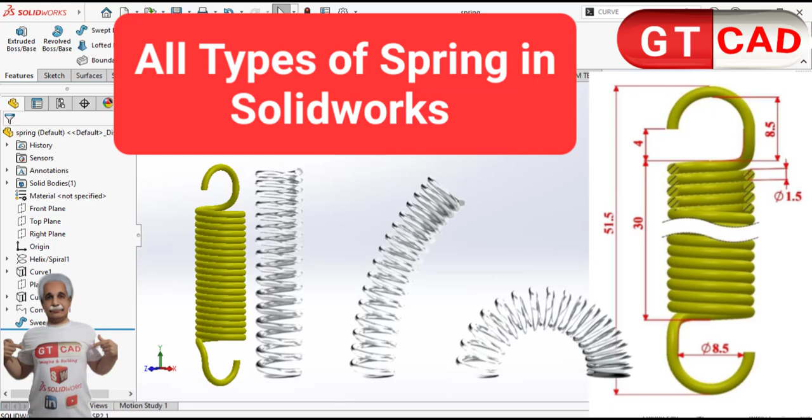Today we have the spring project in SolidWorks. As you see here, we have the tension spring. Let's go describe some types of spring. Here we have the tension spring, compression, spiral, and torsion spring.

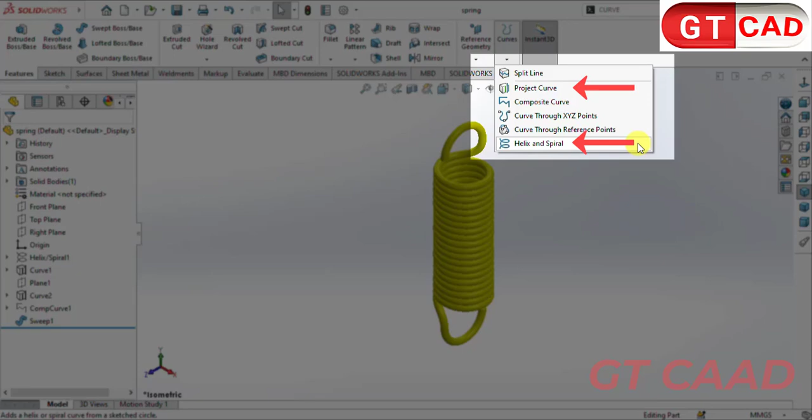In this project, I want to support two types of spring, tension and compression. Compression is so easy, but for the tension, we have some advanced features in curves in SolidWorks. In the Features tab, we have Curves, and Curves has some features like Helix and Spiral. Also, I want to use Project Curve, to combine some sketch curves into one sketch, and after that, Composite Curve.

Okay, let's look at the drawing. Here we have some dimensions of this spring. As I said, this spring is the tension spring. It's the standard dimension. Here we have 1.5 millimeters as each coil diameter. It means I used a wire to produce this spring where the diameter of the coil is 1.5.

The main body is 30, and the total or free length is 51.5. Here the gap of the hook between the main body and the hook is 4 millimeters, and the total length of the hook from the main body is 8.5, and the final dimension is here: the diameter of the hook is 8.5. Okay, let's go model this spring.

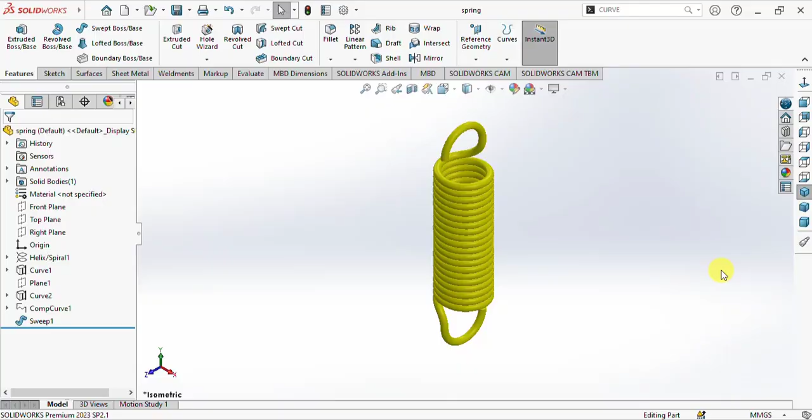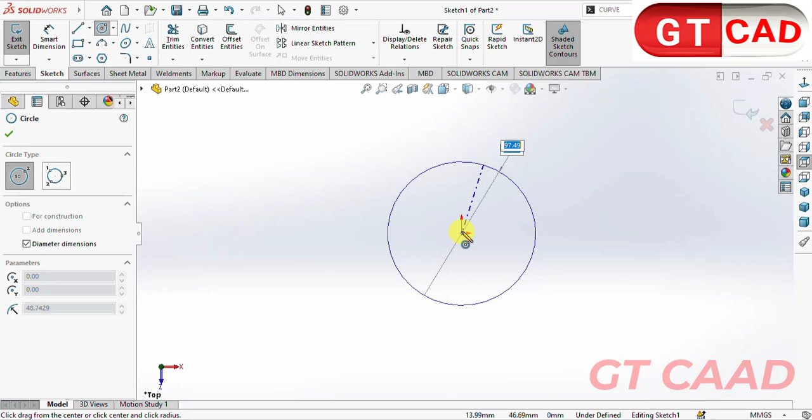The first step, press Ctrl N, create a new part. Create a 2D sketch on the top plane. So we have 30 millimeters for the main body and 1.5 for each coil diameter. Okay, turn back to SolidWorks. Create a circle. The diameter of the circle is 10 millimeters.

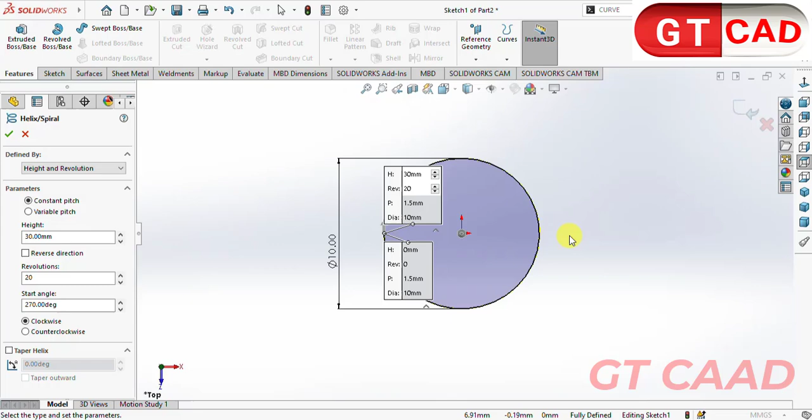You can exit the sketch or directly go to Features, go to Curves and select Helix and Spiral. As you see, it turns into the spring curve shape. I want to select Height and Revolution. Here the total body, as I said, is 30 and the revolution is 20.

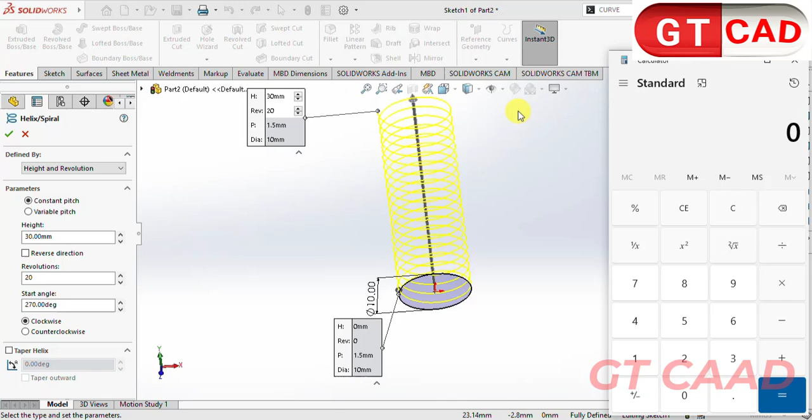Calculate the coil. It means when your main body is 30 divided by 20, each coil diameter is 1.5, and select OK. To create the compression spring, as I said, is so easy. Just use Swept Boss/Base. In the second option, we have the circular profile, change the coil diameter to 1.5 millimeters and just select this helix and spiral.

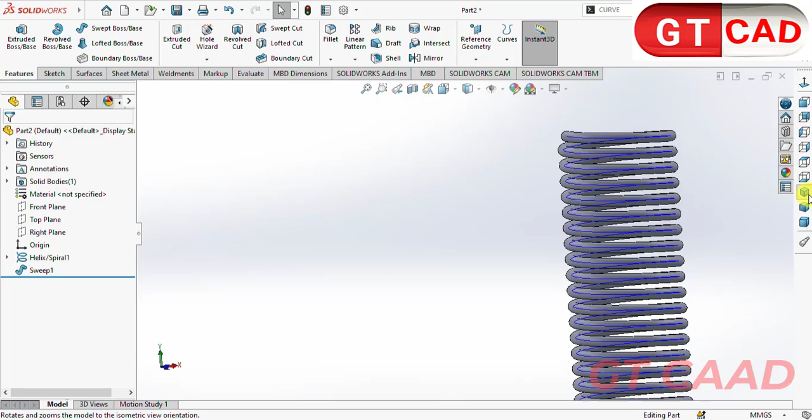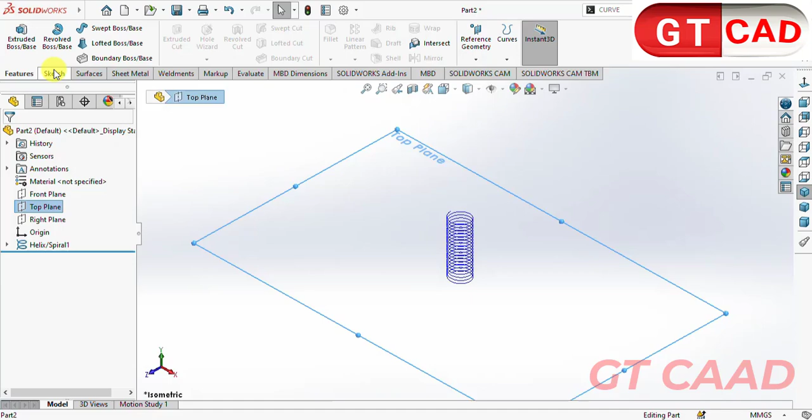Okay, our compression spring is created. You can hide the spiral sketch. As I said, you just need to use Swept Boss/Base and a simple helix and spiral. Okay, I delete this sweep, select the top plane, create a 2D sketch. I want to continue the revolution till here. It means I want to create a curve, a quarter of a circle.

Use the 3-point arc. For example, I want to start it from here till here. Just drag it. Okay, make a coincident. The center of the arc and the origin should be coincident. Here, the end of the arc and the origin have a vertical relation, and this point and the origin are horizontal.

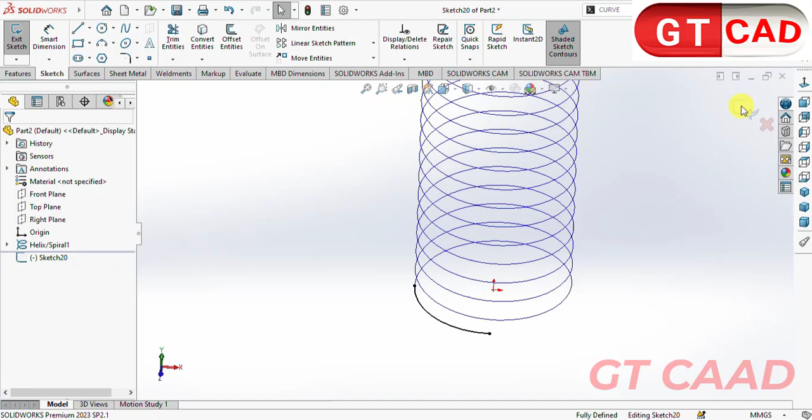To define, use this point of the arc and the spiral curve with a pierce relation. Our sketch is fully defined. Exit. It's the continuation of our revolution spiral. Here, create a new sketch on the front plane. Let me check again. Okay, front plane. Create this sketch here on the previous sketch and drag it till here.

Again, make a relation: this point of the curve and the origin should be in a vertical relation. The center and the end point of the curve are horizontal, and the center of the curve and this point of the previous sketch are vertical. Let's go to isometric view. Select the previous sketch and select Convert Entities. It changed into a direct line.

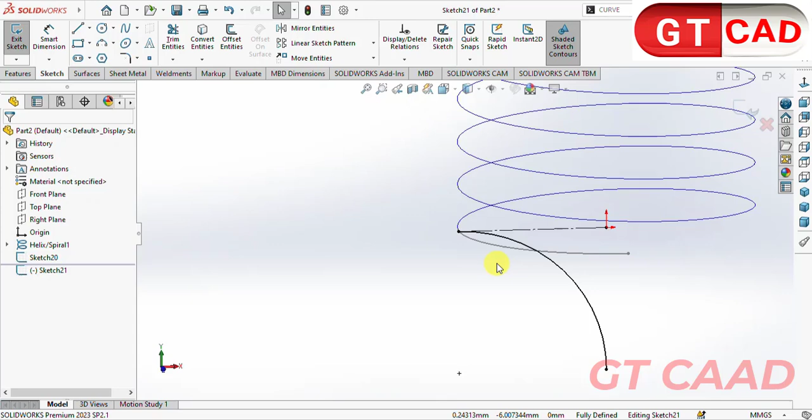Select it and select For Construction, because we don't need to use it in this sketch. As I said, we need to fully define our sketch, and it's okay. Exit. Here we have the two sketches. Let me show you in an isometric view.

Here, one of them is the continuation of the helix. It's the continuation of the helix curve. After that, here I create this shape. It's like our hook. Okay, I want to combine two sketches into one sketch.

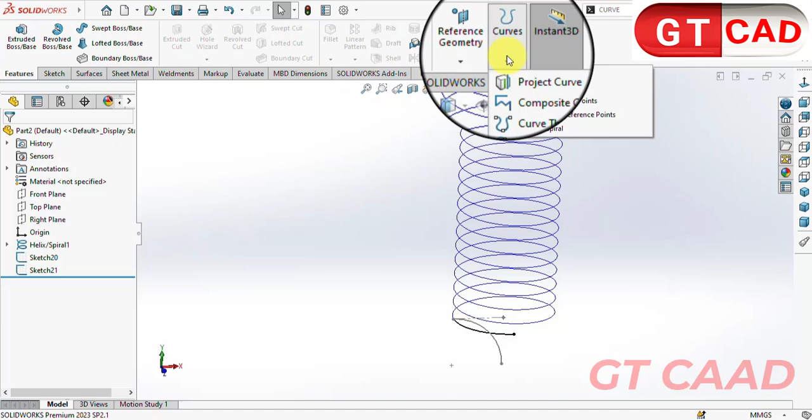Under the curves, we have the features. It's the project curve. Select it. The second option is sketch on sketch. Select this sketch and this sketch. Click OK. This is the result.

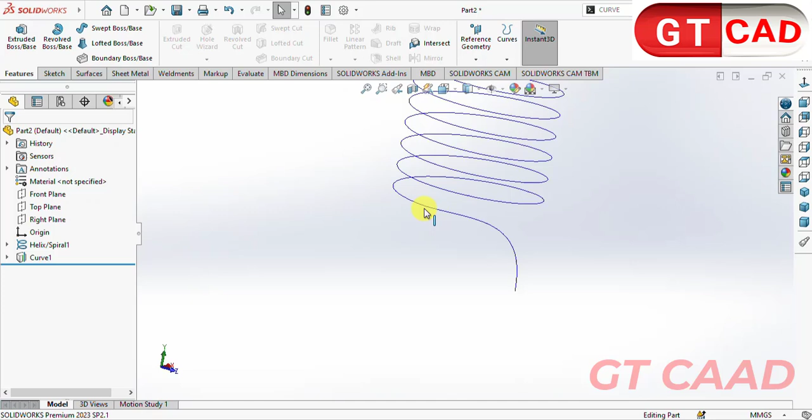It wants to rotate or revolve a quarter of the circle, but in this curve shape, top side. But here we need to define a plane. As I said, the total length of the body is 30. Okay, click the top plane. After that, directly click on the plane. Here the offset is 30.

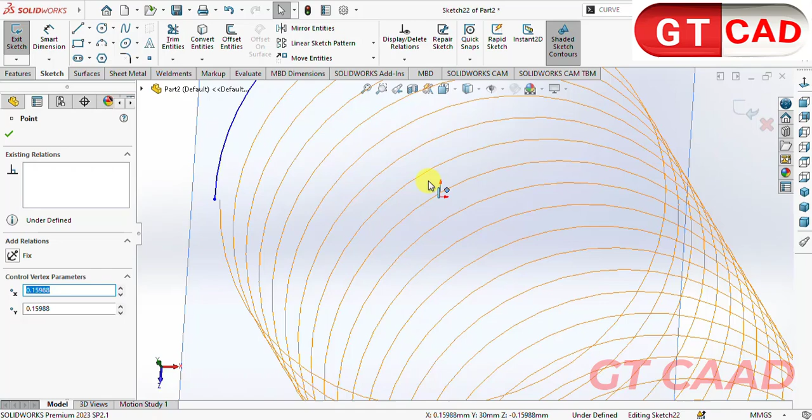Our plane is created on the top side, and create a 2D sketch. And do it for the top side as the bottom side. 3-point arc, and here we need just a quarter of the circle. Our center of the curve and origin, let me normal to view here, is coincident.

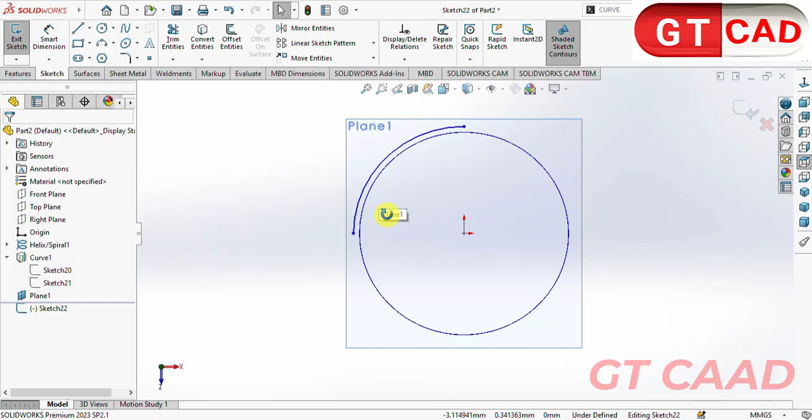This point and this point about the origin should be horizontal, and the end of the curve should be vertical about the origin. After that, select one of the points, first or end point of the curve, and with the helix it should be pierce. Okay, exit.

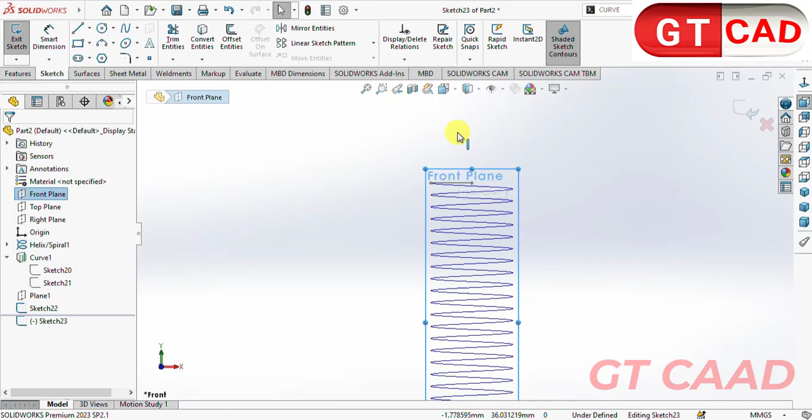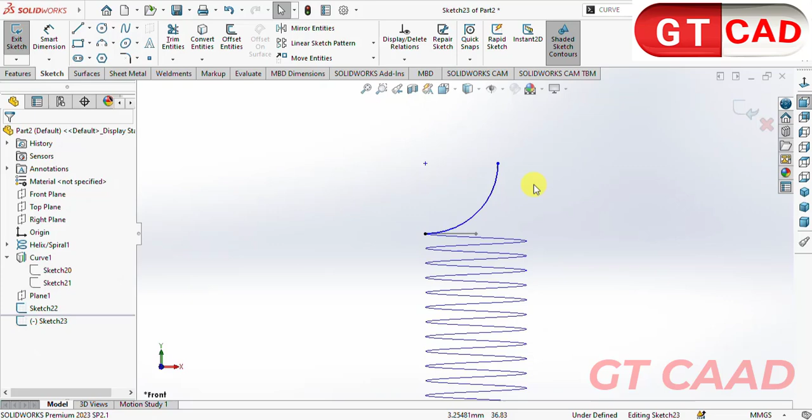Let's hide this plane. In the front plane, create a 2D sketch and create a 3-point arc, but in the reverse direction. It means I want to create a 3-point arc. Select the center of the curve, and the first point of the curve should be vertical. The center and the end point should be horizontal. After that, the end point of the curve and the origin should be in a vertical relation.

Exit. As I said, we have the two sketches. I want to continue this, the first sketch, but in this shape. Go to the feature, under the curve, project curve, select this sketch and this sketch. Okay.

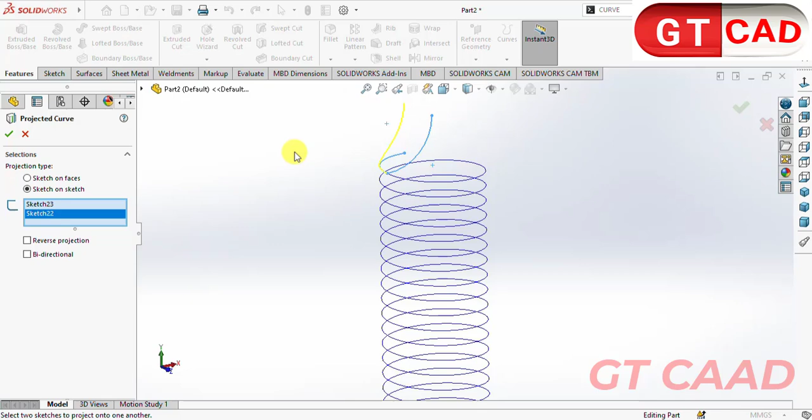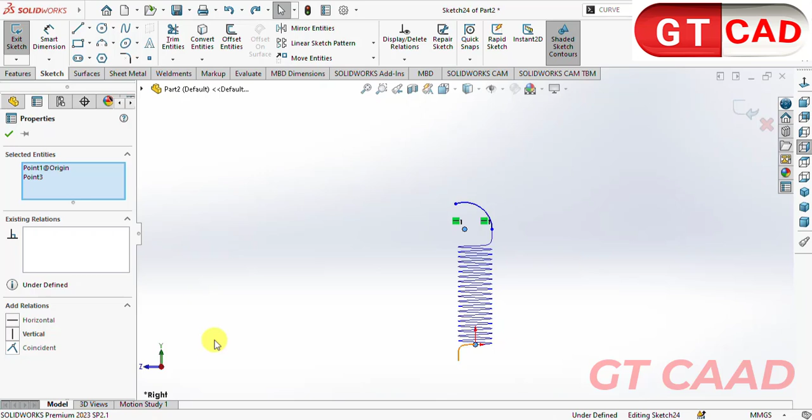Right plane, create a 2D sketch. Select the 3-point arc. Okay, the center of the curve and the first point of the curve should be horizontal. The center of the curve and the origin should be vertical. And this point, first and end point of the curve, should be horizontal.

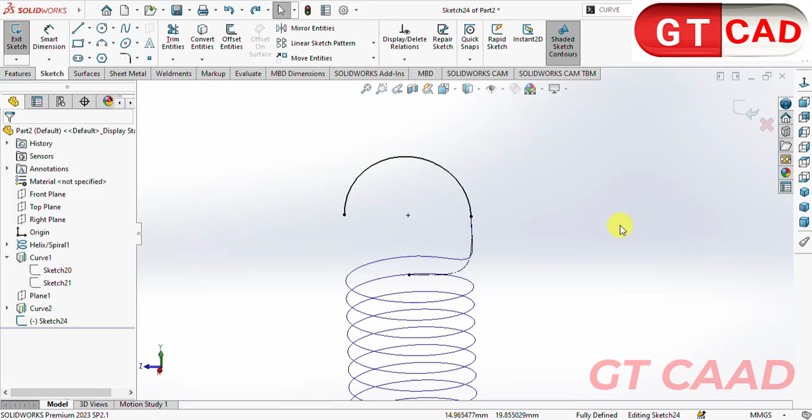Select this curve line and convert entities. Make it for construction because we don't need it, we just need to make a relation. The first point of the curve and this point should be merged. Okay, our sketch is fully defined. Exit. Okay, create the downside hook.

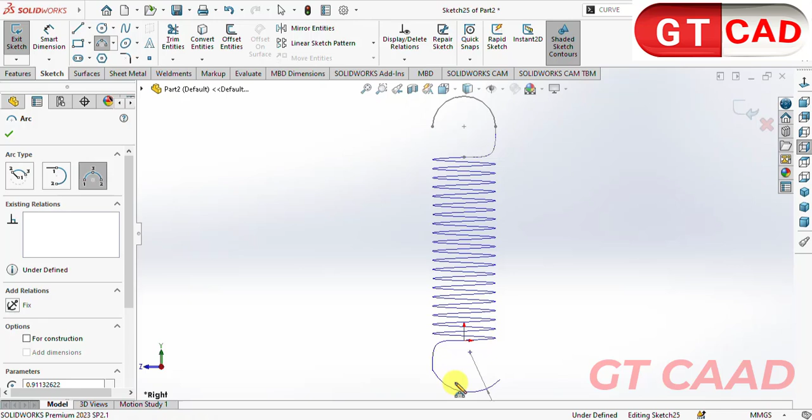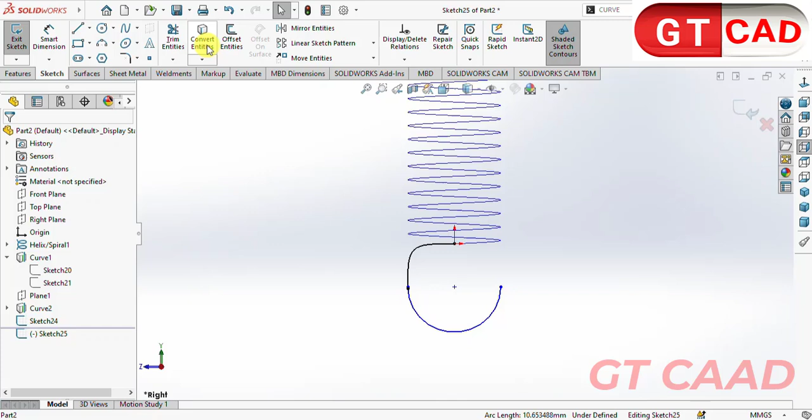Again, in the right plane, create a 2D sketch, and here, use the 3-point arc. This center and the first point horizontal. This point and the center is horizontal. The center and the origin is a vertical relation. And select this curve line, convert entities, and make it for construction.

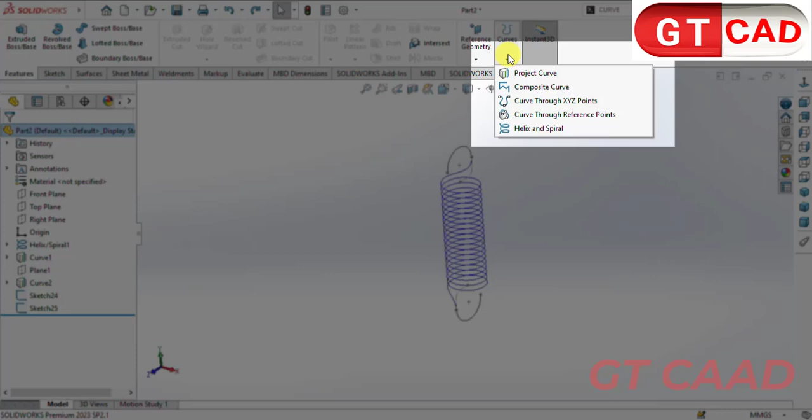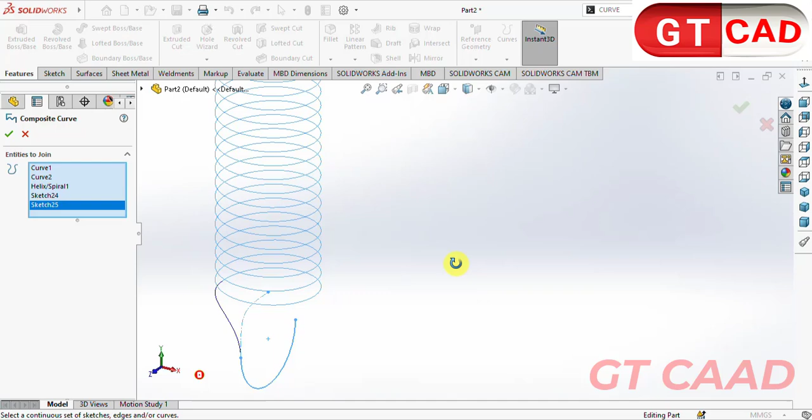After that, this point and this point of this curve should be merged, and it's turned to black. In the feature tab, in the curves, we have an important feature, the composite curve. Select it and select all curves. For example, this hook, the main body here, and the last one is the downside hook. Let's check it and select OK.

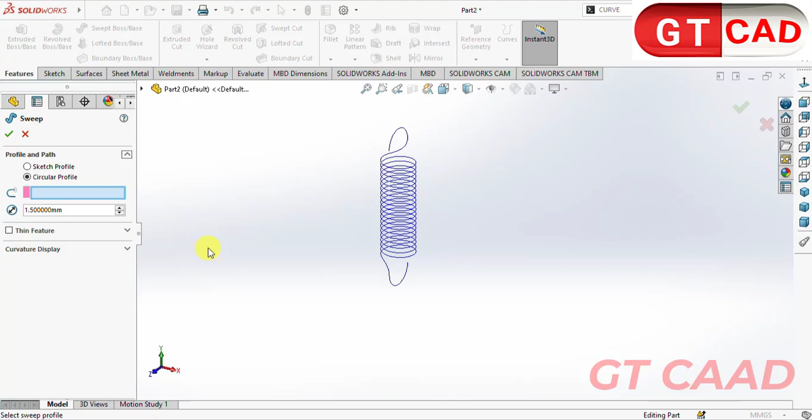When I drag my mouse on the spring sketch, all the sketch is selected. The last command is the swept boss/base. The second option, we have the circular profile, and the coil is 1.5 millimeters, and the path is this curve. Okay, let's hide the sketch. As you see, our spring is created.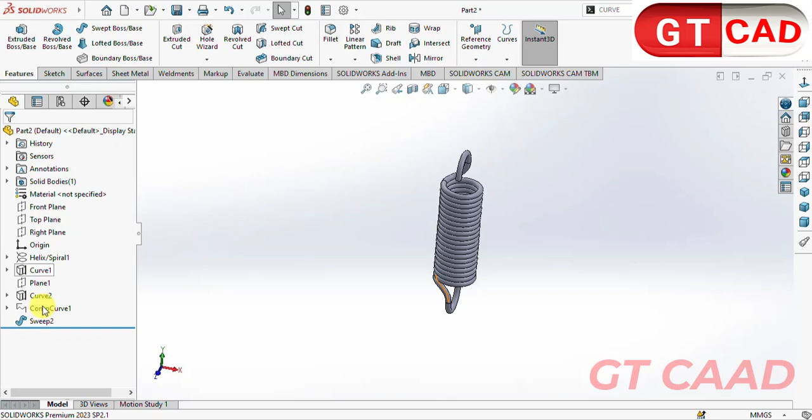It's so easy. You can use these features in other projects, for example. It's so important. This lesson we learned helix and spiral and project curves and composite curves.

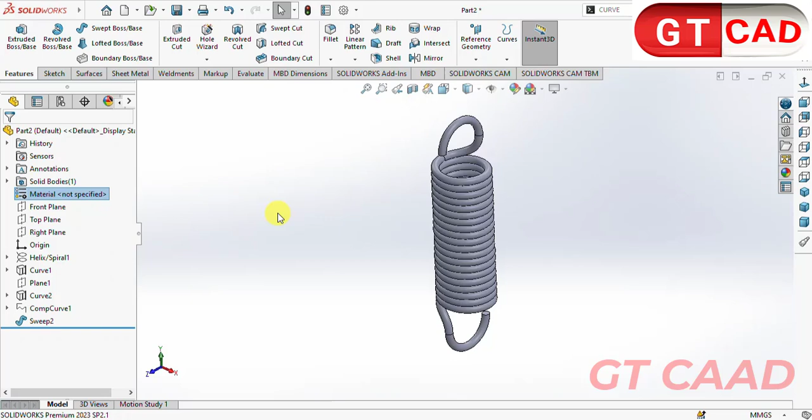Okay, let's change the material into Ck60 or other spring material. Okay, I think the last folder is here. C60E, or the DIN standard is 1.1221. Select it, apply. Okay, our lesson is finished.